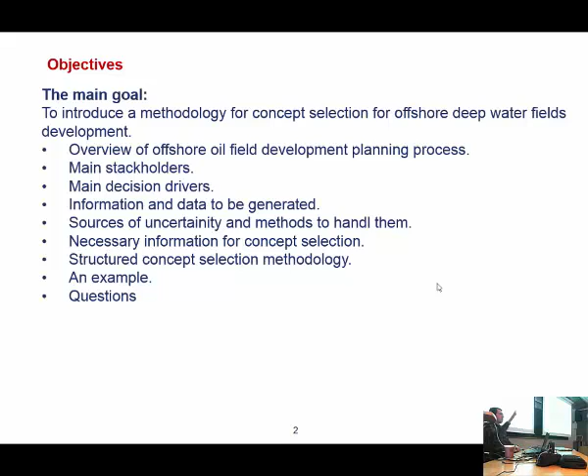But whenever you have a question, just raise your hand and stop me - I can answer your question during the presentation.

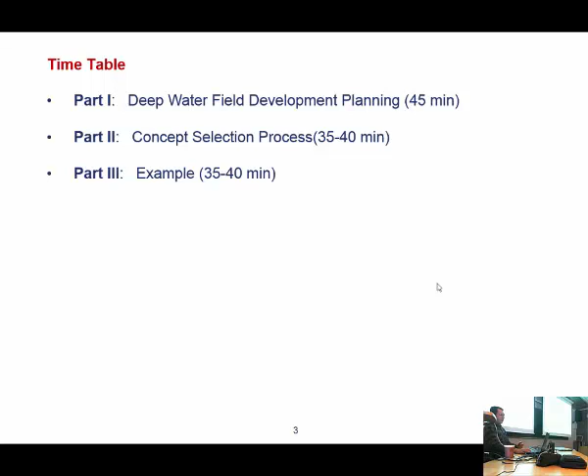Based on the initial schedule of the class, I have divided this presentation into three different parts. First part is deep water field development planning, which I think most of you are quite familiar with - it's mainly about subsurface. Second part is the concept selection process, and the third part is an example.

But let me explain why I selected this topic, or why I, as a naval architect, became interested in it. First of all, this topic was one of my personal concerns, both during my education at university and during my career in industry. Also, this topic was not touched upon properly during my education, at least at the Department of Offshore Engineering, and I haven't seen any courses at any university yet on this topic.

This is also one of the main challenges for all offshore oil operators. It's a very interesting topic because it's interdisciplinary, and when you study this topic you will become familiar with other disciplines in your business.

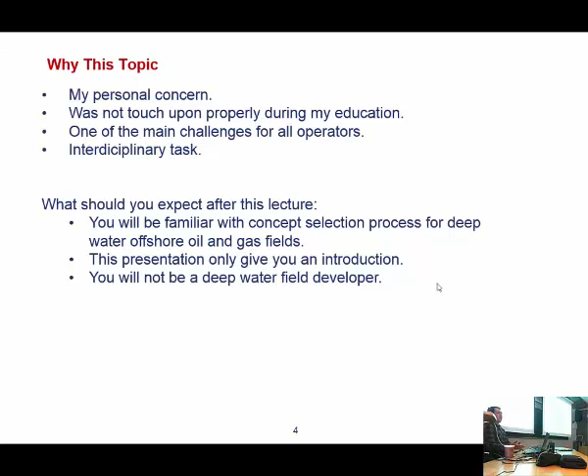So what should you expect from this lecture? Definitely you will become familiar with the concept selection process for deep water offshore oil and gas fields - this presentation is only an introduction to this topic. So you should not expect to be a field development planner after this lecture; you will definitely need much more information and much more experience.

Classification of offshore oil and gas fields. To reduce the effort to select proper technology and strategy and cost estimation method suitable for your offshore oil and gas field, it is better first to categorize offshore oil and gas fields based on major properties.

In general, we can classify offshore oil and gas fields based on these main characteristics: water depth, environmental condition, and reservoir size. For example, based on water depth, with the main function of operation, not drilling, because then the classification would be different. For operation, we can classify offshore oil and gas fields into shallow water, intermediate water, deep water, and ultra deep water for this range of water depth. But these are not fixed definitions.

This is just a rough estimation because the industry is improving. Up to now, the technology which has been used for shallow water, which is the jacket, has been used to a maximum water depth of 420 meters, which is the Bullwinkle jacket in the Gulf of Mexico, I think. And this is proven technology for this water depth.

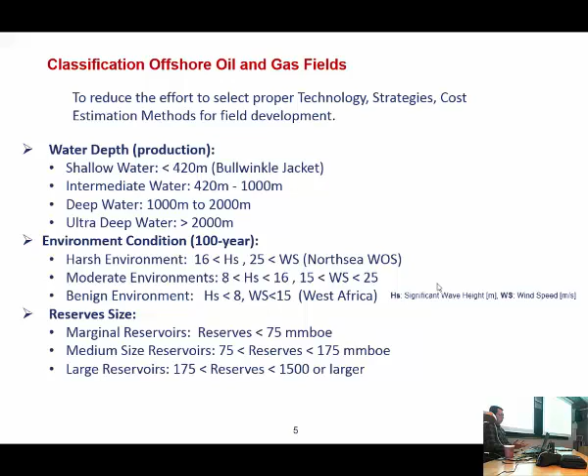Or based on reservoir size, we can define them as marginal reservoirs, medium-sized reservoirs, large reservoirs, or sometimes I've seen ultra-large reservoirs as well, which is based on the reserves in the reservoir.

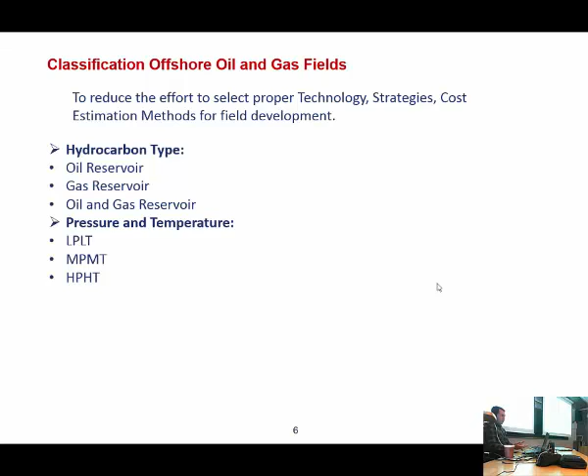We can also divide offshore oil and gas fields based on hydrocarbon type. It can be an oil reservoir, gas reservoir, or oil and gas reservoir. It can also be categorized based on pressure and temperature: low pressure, low temperature; medium pressure, medium temperature; and high pressure, high temperature.

But you may have this big question in your mind: why should we go to deep water when we have a significant amount of onshore and even shallow water offshore oil and gas resources? The answer can be explained by this graph here. This is the global energy demand based on historical records for the last 45 years and forecasted for the next 15 years. As you can see, global energy demand is still increasing, and oil and gas still make a major contribution to that.

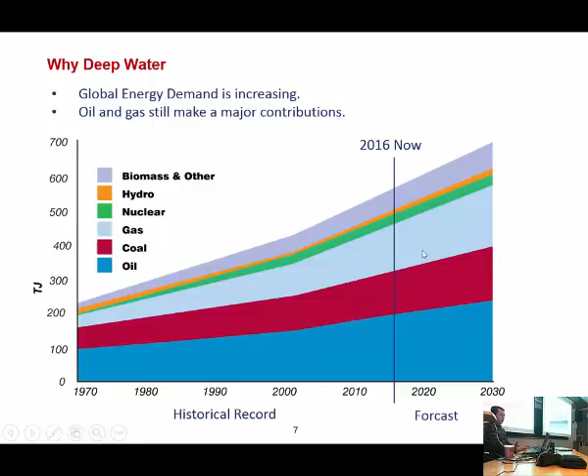On the other hand, if you look at the historical offshore, shallow water offshore, onshore and deep water offshore production during the last 50 years, shown here, the bottom part shows onshore oil production, light blue shows shallow water oil production, and the black shows deep water offshore oil production. By looking at this graph, you can figure out that onshore oil production passed its peak in 1979 and is declining in different parts of the world at an average rate of 4 to 8% per year.

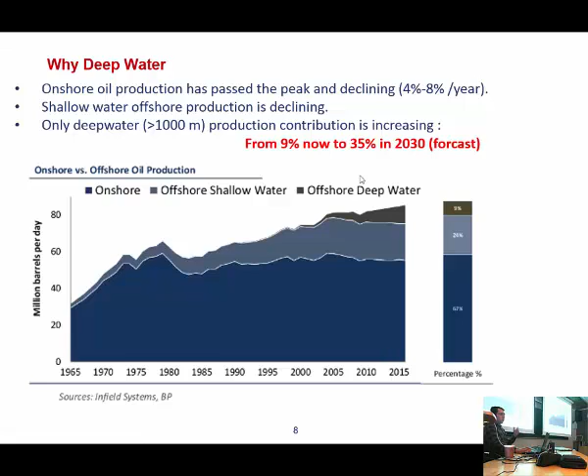Also, shallow water offshore production is almost unchanged, or even some records show it is also declining. What remains is only deep water offshore, which has a 9% contribution to total oil production, and this production has to increase to 35% to cover global energy demand by 2030. So what remains is only deepwater offshore oil and gas resources.

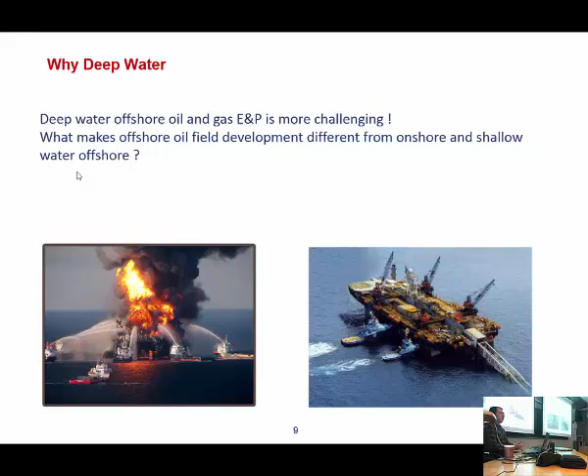But operation and planning for deepwater offshore is quite different from shallow water and onshore oil and gas production. As you can see here, deepwater offshore oil and gas exploration and production is more challenging. But what makes it more challenging compared to onshore and shallow water offshore?

Fortunately, the technology for deepwater exploration and production up to 3,000 meters has been developed and approved. That means now humans are producing oil and gas at water depths of 3,000 meters.

But what still makes this business different from onshore and shallow water offshore is, first of all, you need higher capital cost, drilling cost, and exploration cost. There is high uncertainty in most commercial parameters like well performance, recovery, and oil prices, and there is substantial risk for operation in this area.

As you can see here, a small failure in the system can lead to such big consequences, and you may lose all of your property there. Because you are working in a remote area, maybe 200 miles from onshore, you are working in a harsh environment like west of Shetland or northwest of Australia, and most of the time you are working with high pressure, high temperature reservoirs.

How is well performance related to the depth of the sea? Because as far as I know, in deep water measurement is more difficult than shallow water, and when you have a less accurate measurement, this will directly affect your prediction.

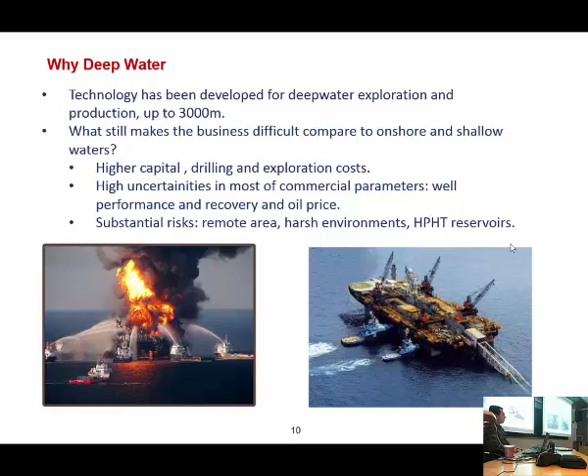Go ahead. Thank you very much. So now we'll make some fundamental questions to be considered during this presentation, and we are actually going to answer these questions.

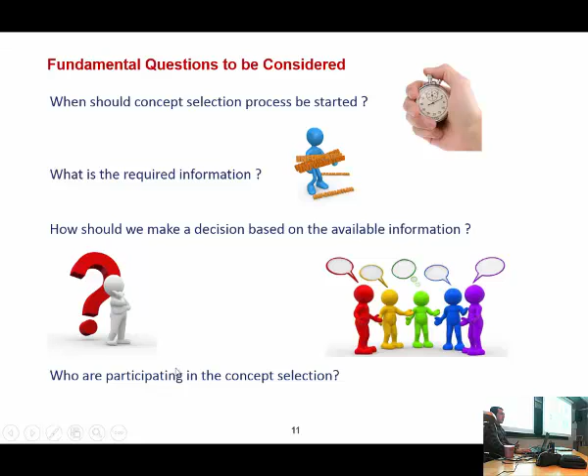First, when should the concept selection process be started during field development planning? What is the required information to be used for concept selection? How should we make decisions based on the available information? And finally, who are participating in the concept selection process?

To better understand the position of concept selection during field development planning, you should note that concept selection is a subset of a multidisciplinary process called field development planning. As you probably know, a typical offshore oil and gas life cycle can be divided into 8 subsequent phases.

It starts with acquiring the lease, which the government usually organizes based on the size and location of the block through a bidding process. Different operators, maybe alone or grouped together, will attend this bidding process, and one or a group of them will win the exploration license, and then exploration, the second phase, will start.

The operator, with geological study, exploration methods and exploration technology, will specify the first location for wildcat drilling. The main objective is to find the reservoir.

After you find the reservoir, you start the third phase, appraisal, which doesn't actually start exactly after exploration, because some activities run parallel with exploration activities. The main objective is to specify or improve your information about the dimension of the field, field life, field characteristics, production rate, and reserves.

After you have enough information, you can go to the concept selection phase, where you specify different concepts, and then do technical feasibility and economical viability studies, calculate the revenue and required investment. There is one important point to notice here: when you are doing concept selection, there is still high uncertainty in the reservoir characteristics.

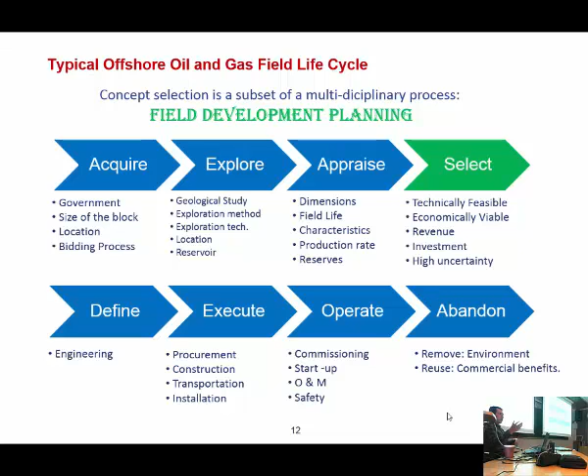After field life finishes or production rate drops below economic margin, we go to the last phase, which is abandonment. You may need to remove the infrastructure completely to avoid damage to the environment, or you should plan to reuse it to make some commercial gain. For example, you can use the available structure for neighboring fields which have been discovered later.

But why did field development planning become so important in the offshore oil industry, especially in deepwater offshore oil? To answer this, we can look at the historical development in the offshore oil industry, which was mainly initiated from the Gulf of Mexico. The first floating production unit in the Gulf of Mexico was used in 1986, Green Canyon 29, which was a semi-submersible. After that, during just 13 years, 12 floating production units were sanctioned, which were SPAR type, semi-submersible, and TLP type, by major oil operators, big operators.

But after that, in just 2 years, a boom in using floating production units happened. 14 floating production units were used in the Gulf of Mexico in just 2 years, consisting of 11 dry trees and 3 wet trees. This time, independent oil companies, smaller oil companies, came into the game. So you can imagine how big the competition was between them.

During 2000 to 2005, even with low oil price, 13 floating production units were sanctioned in the Gulf of Mexico, 10 dry tree and 3 wet tree. But what was the reason for this acceleration? The reason was, one, high oil price for oil and gas for some period, which shows that there is potential for production from deep water.

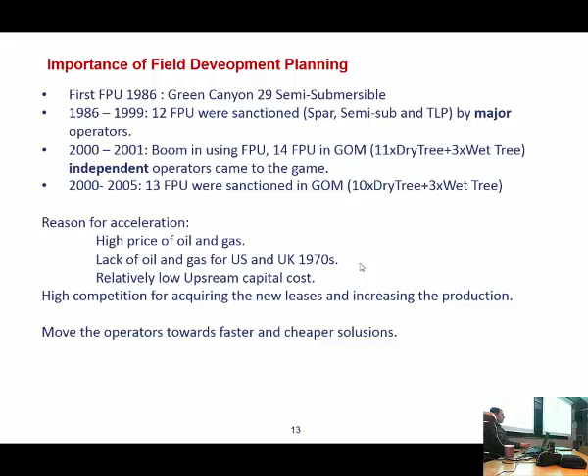What is this dry tree and wet tree? This is a type of Christmas tree, which I will explain later. Depending on the position, if you have a Christmas tree on the seabed, we call it wet tree, and if it is on the platform, we call it dry tree. I will explain this later.

This had very bad consequences for our industry, which were discovered a few years later. An assessment of existing projects in 2005 by major oil operators showed that a significant percentage of deepwater offshore oil and gas reserves were underperforming both technically and commercially due to poorly executed field development planning. That was not mainly due to weakness in execution or technology; it was because they had selected the wrong concept. For example, after a few years of operation, they realized they needed 4 more risers on their platform, but they hadn't considered enough space there.

This fact has been explained with this beautiful graph here. This graph shows that in the first 4.5 phases of an offshore oil and gas field, you can have major influence on the value of your project if you have poor definition, meaning if you don't spend enough time and money. In the execution phase, if you have good or poor execution, there will not be so big a difference. But if you spend enough time and money and make good definition and good planning, then during execution phase, even with poor execution, you still get much more value compared to the first case.

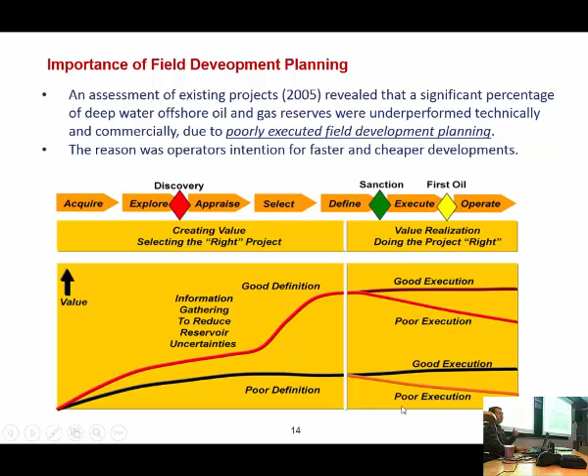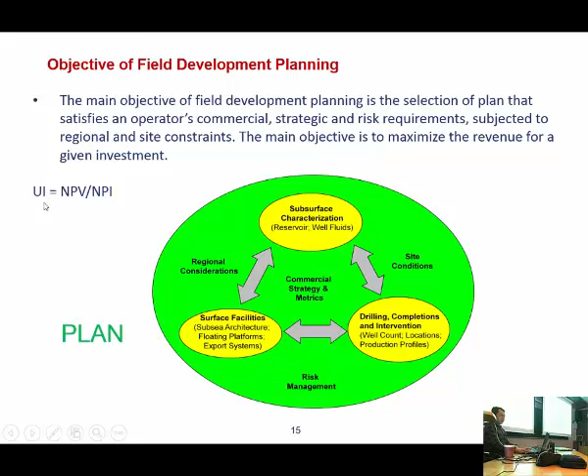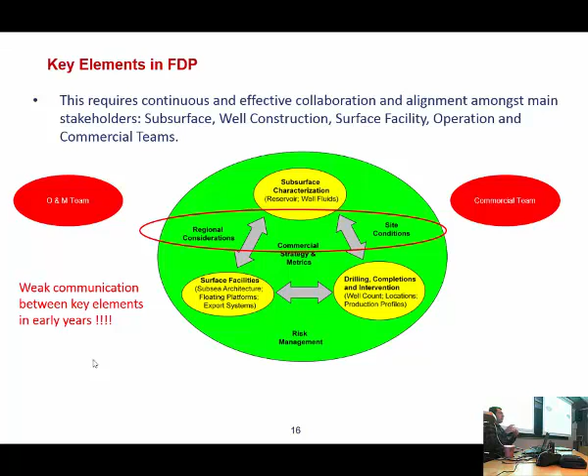In order to have a successful field development plan, you need continuous and effective collaboration and alignment among main stakeholders: subsurface team, drilling and completion team, surface facility team, commercial team, and operation and maintenance team. Weak communication between these key elements in the early years of the offshore oil and gas industry was the main reason for underperformance. All of these teams were working independently without considering the effect of their results on the subsequent discipline.

This flowchart shows a methodology for concept selection. In the first step, the subsurface team makes an initial reservoir model based on seismic data, well logs, well tests and other measurements. After that, the subsurface team together with the drilling and completion team makes different depletion scenarios for the reservoir, including different well counts, different top hole locations, and resulted production profiles. Their main objective is optimizing the drilling program, meaning greatest recovery with fewest wells.

But why is number of wells so important for deep water? Because drilling and completion may be around 25% or even up to 50% of the total budget required for field development, while this can be much less onshore or in shallow water offshore.

In the next step, the surface facility team will identify different basic building blocks based on this depletion scenario, considering site conditions, existing infrastructure, and market strategy, and they will generate multiple development scenarios for this field, which is called the concept screening phase.

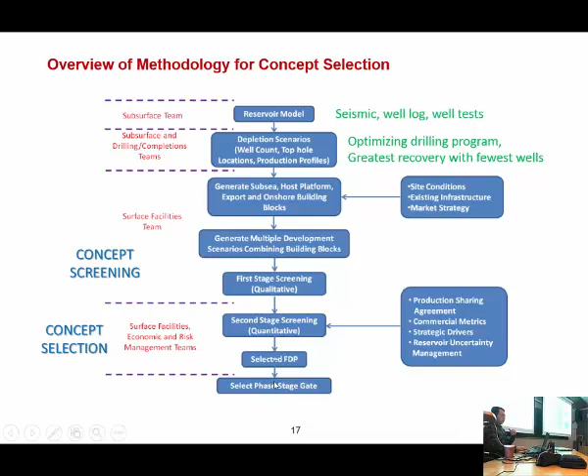In the next step, called concept selection, the subsurface and facility teams together with economic and risk management teams will consider different production sharing agreements, commercial metrics, strategic drivers, and reservoir uncertainty management methods. They make a quantitative, more accurate comparison between the remaining concepts until they finalize one concept, which will be sent to the selection phase. So this is the whole story of concept selection and screening in one slide.

What are the main input parameters and their effect on field development and concept selection? In general, we can divide the parameters into 6 different groups: reservoir geometry and geology, which has the greatest effect because they directly determine recovery factor and flow rates; well count, location and construction; secondary recovery methods; fluid properties, which can directly affect subsea and topside design, operation and maintenance requirements; and drilling and completion, which can directly determine well management requirements and well intervention frequency during production.

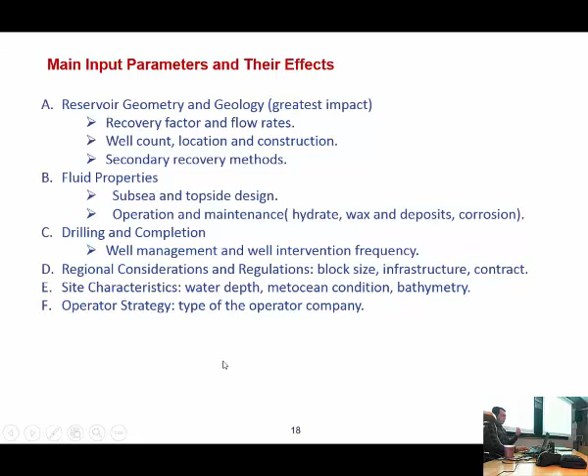After that, regional and site constraints and regulations, site characteristics, and operator strategy, which we will explain in more detail in following slides. This slide shows the relative importance of parameters in reservoir geology and geometry.

Usually field development planners keep this as a main guideline in their mind, and they know that permeability is very important, for example, for secondary recovery. So this is one of the quantities that should be characterized as accurately as possible, and almost there is no limit on that. You should try to improve your understanding of the permeability as much as possible.

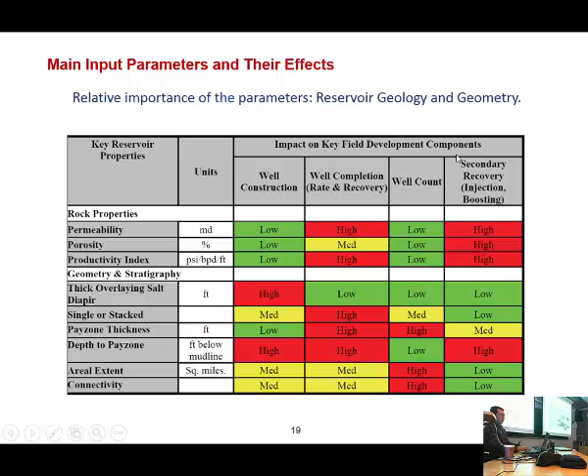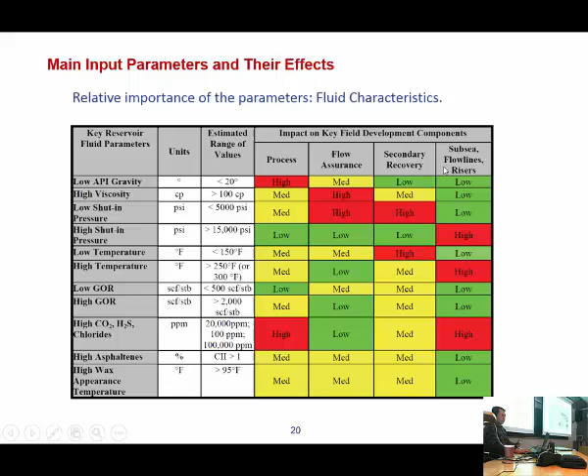This is the effect of other parameters on key field development components. For example, this slide shows the relative importance of fluid characteristics, or their effects on field development components. This is just to show how important different parameters are for field development planning.

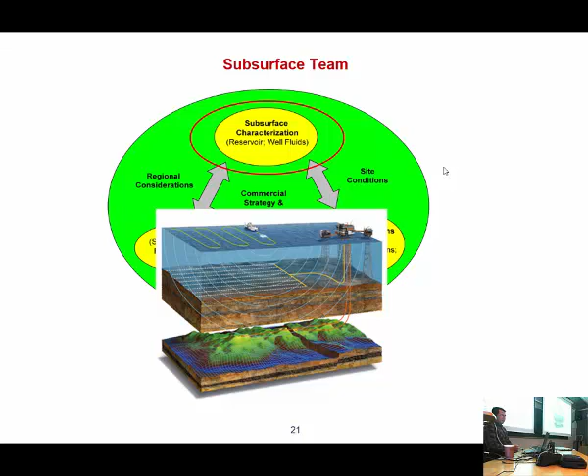Now we will take a look at the responsibility of different teams during field development planning, mainly concept selection. The first team is the subsurface characterization team. Their main objective is to characterize the reservoir, but how is a reservoir defined?

You need to determine hydrocarbon type and saturations, oil-water and oil-gas contact lines, fluid physical properties, fluid systems and chemical compositions, driving mechanisms of the reservoir, and flow rate and pressure variation over time. When you specify these parameters, then you can have a reservoir ready for concept selection.

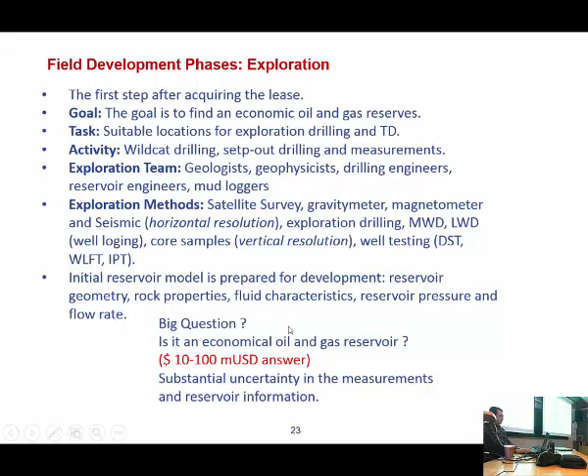At the end of the exploration step, your boss may ask you a big question: is it an economic oil and gas reservoir? And you can tell him you should spend $10 to $100 million more to answer this question, because there is still substantial uncertainty in the measurements and reservoir information, even after you find the reservoir.

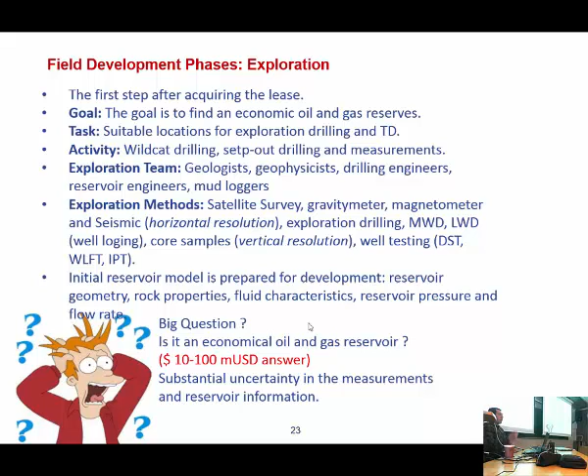Because of that, to improve our information, we start another phase called the appraisal phase. The main goal in this phase is improving the quality of the data and reducing uncertainty.

The outcome of this phase will be fluid characteristics, original oil in place, recoverable oil, and production profile - but still with sufficient uncertainty. Uncertainty actually is your best friend during field development. You cannot completely remove it.

In this phase, the methods you use are quite similar to those used during exploration. For example, you make more appraisal wells at different locations, but with more measurement, or better to say, much more accurate measurements.

In this step, the subsurface team finally provides a robust reservoir model from seismic data, appraisal wells, well logging, and well tests.

One of the main tools in this step is reservoir simulation, where you do multiple simulations with varying well types. Using measurements from the appraisal phase, you start making new wells with your reservoir simulation software and try to fit your data to the measurements. Using that, you can characterize uncertainty in your parameters.

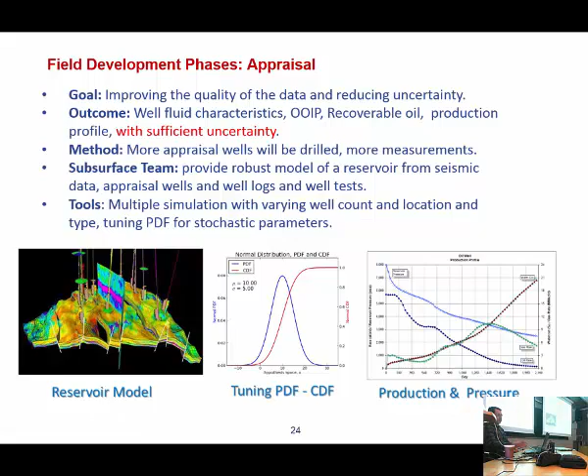For the field appraisal phase, there are several different methods and strategies to reduce uncertainty, as shown here. There is always a trade-off between cost and risk reduction. If you need a more accurate method, you should spend more time and more money.

Different methods available now are drill stem test, more appraisal wells, extended well test method, early production, and stage development and phase development strategy. It's not actually only a method, it's a strategy. For example, instead of developing the field completely, you divide the field into several phases.

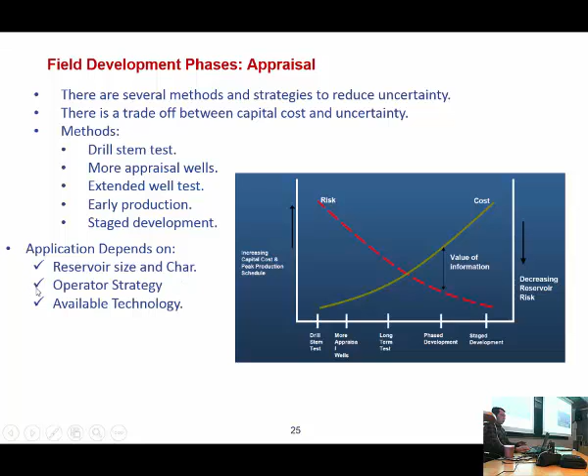Like Johan Sverdrup, you start production in one phase. After you collect more information and improve your understanding about the field characteristics, after 5 years of production you make a new plan for the rest of the field. So application of this method depends on reservoir size and characteristics, operator strategy, and available technology.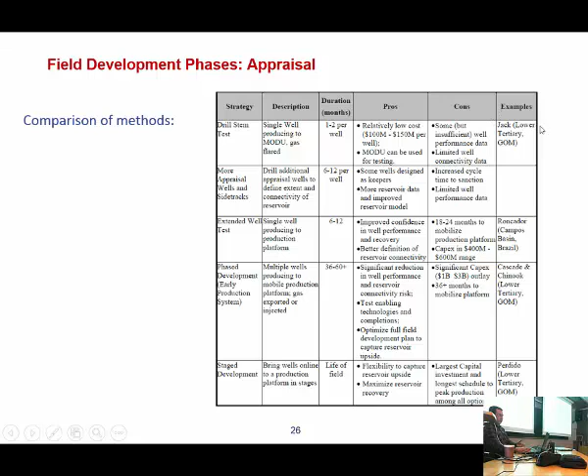Here, just for example, we have a table which shows these different strategies and methods, their general descriptions, typical durations of the test or method, advantages and disadvantages, and some examples that you can take a look at later. It's quite self-explained.

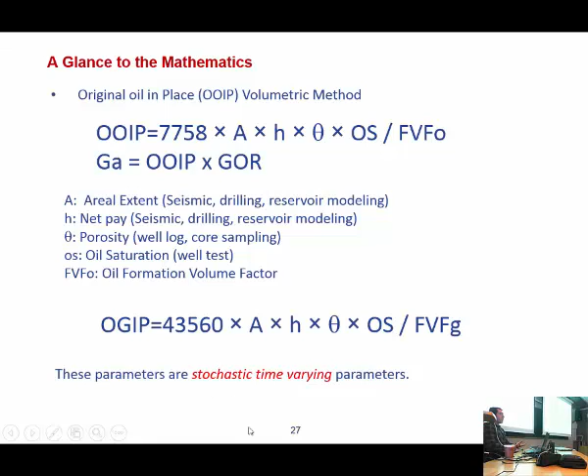So here, just to show the complexity of the problem, we take a glance at the basic mathematics of field development. For example, original oil in place is a function of several different parameters, as you can see here. All of these parameters are in some way stochastic, time-varying parameters. They are stochastic and some of them are also varying over time.

Or here, for example, is oil production rate. Again, it's a function of several different parameters like downhole pressure, reservoir pressure, permeability, some of which are also a stochastic problem. You can, for example, specify production rate by curve fitting to the well test data, fitting your measurements to exponential, harmonic, and hyperbolic curves.

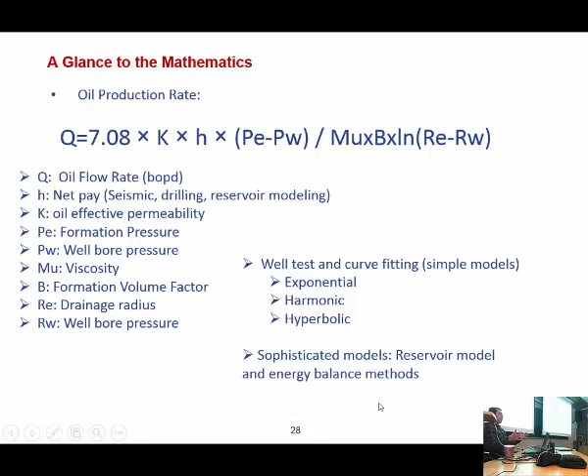Or after some years of operation, when you have enough information available, you can make sophisticated reservoir simulations, and by the energy balance method, you can improve your reservoir estimation and production rate. But as you can see, it is very difficult to make a decision based on a multivariable stochastic problem. We should find some way to integrate all of this uncertainty together into a single problem and then make a decision on that.

As suggested by the Society of Petroleum Engineers, for financial evaluation, uncertainty in all the parameters should be integrated into a single parameter, which is the production profile. Then at the end, you can have 3 different confidence levels for your reserve estimation, or better to say for your production profile.

These are known as proven, probable, and possible. To understand those, it's better to say: if you make a calculation based on information which you are 90% sure about the correctness of the data, you will get proven — you get one profile. If you use data which you are only 50% sure about, it will be probable. And if you make an estimation based on data which you believe is only 10% correct, you will get possible.

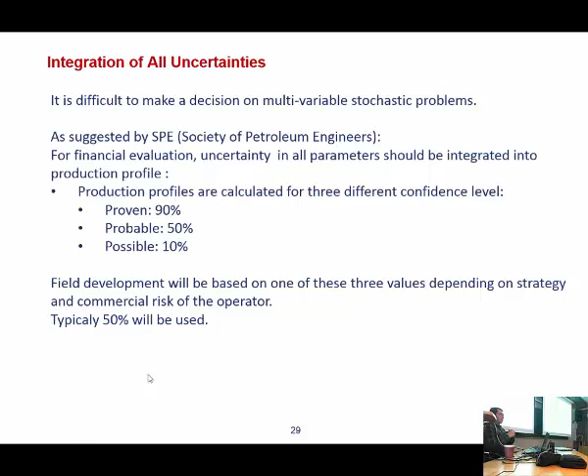So the next team is the drilling, completion, and well intervention team. Well construction and intervention is the main objective of this team. But what does well construction mean? Well construction actually means determining the construction of the well in the first place, which includes specifying the location of the wells.

Wells can be either production wells, water injection wells, or gas injection wells, with required depth of the well, direction of the well, and well casing design. Also determining well type — production, water injection, or gas injection — and the type of completion, including the perforation zone, meaning which part of the well you have to perforate to start production from that part.

And with which sequence, because the level of oil and gas is changing during the field life, to have optimum production you should find the best location of the perforation zone and how to change it during the production life.

Perforation method can also directly affect well performance, for example, sand production. Also one of the main decisions which affects concept selection is type of access to the well—whether you need direct vertical access to the well from your floating production platform, or non-direct vertical access. You can have your floating production platform here, and access like this.

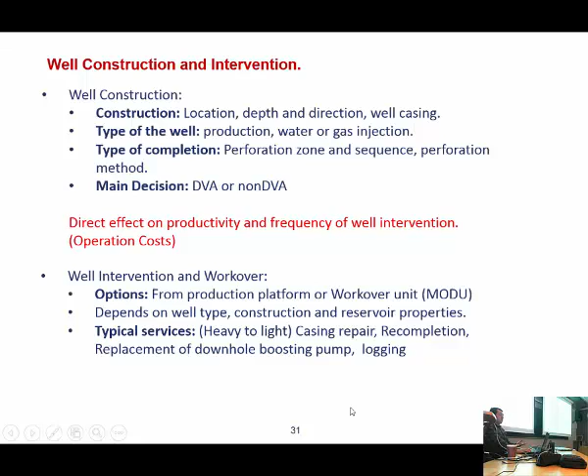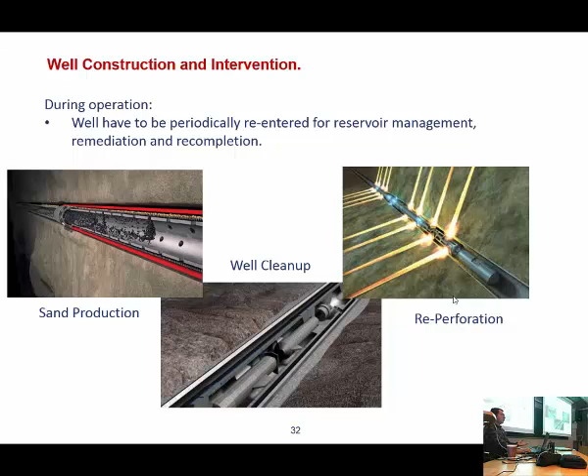For example, when you start production from your well, you may get some sand production, which depends both on reservoir rock properties and also on type of completion. This sand production may reduce your production, and then you have to stop production, send some equipment inside the well, clean up, and start production again. Or you need to reperforate some new zones because the oil level has changed. Or even your estimation was wrong, and after some production, by reservoir simulation you understand this was not the optimum zone for production—you have to move it to new places.

As we mentioned, one of the main decisions during well construction and well intervention is type of completion, or better to say, type of well and well access, which depends on the location of the Christmas tree. You have in general two options: you may have a subsea well, also known as wet tree, with direct vertical access or non-direct vertical access—both are possible—or a surface well, or dry tree, where only direct vertical access is possible.

This is an example of a dry tree system, which is exactly the same technology we use onshore. And this is a wet tree system, which is the Christmas tree with some additional equipment for automation and also for safety, as you can see here, which is located on the seabed.

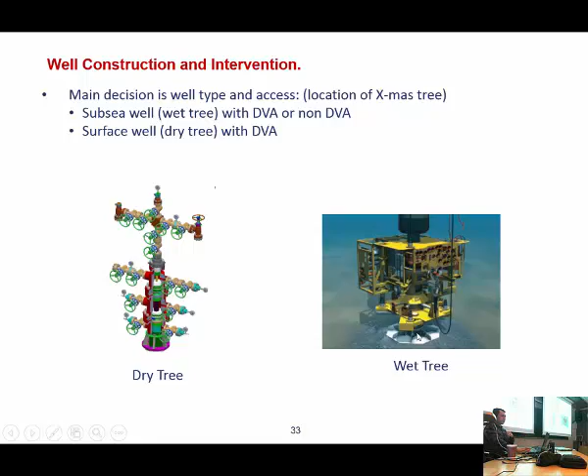But why should we use wet tree for some reservoirs and dry tree for others? Because of the advantages and disadvantages of both. Wet tree or subsea well, as you can see in these two pictures, has in general lower capital cost but higher operation cost. This depends on the number of wells and also the operator's strategy, which puts more emphasis on capex or opex. Also, in general, subsea well gives you lower recovery compared to dry tree.

This is not absolute recovery—this is just 5 to 10% less than a similar dry tree system. It's also usually suitable for low pressure reservoirs, but it gives you greater flexibility for well placement. As you can see here, you can just put your wellhead wherever you like, and then have direct drilling without needing directional drilling, which can increase the cost of drilling significantly. It's also suitable for high uncertainty reservoirs and multiple sub-economic reservoir development.

Also, all host units support wet tree, so you don't have any limitations for the top of the floating production unit, and both direct vertical access and non-direct vertical access are possible. So why is the recovery less in this case? One factor, at least that I know, is because of the technology you are using on the subsea system, which needs more safety there.

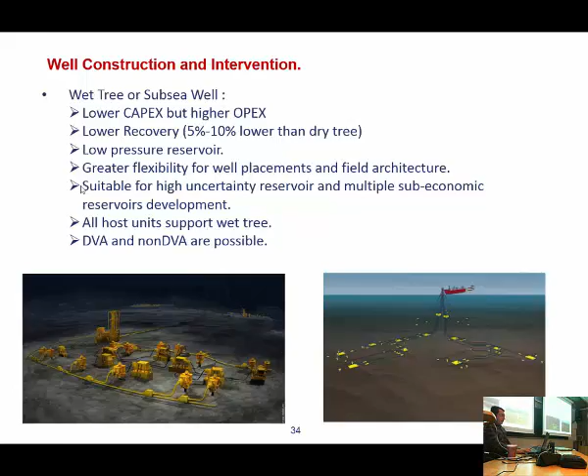But on the other hand, dry tree or surface well systems need higher capital cost but lower operation cost. So if you have a reservoir with like 25 years lifetime, a dry tree system can be better because it has lower operation cost, and the accumulated cost in the long term will be much less than a wet tree system. It also has relatively higher recovery and is suitable for high pressure reservoirs, which is also very important.

But you can only use it on a fixed platform or floating production platform with very limited horizontal motion, like a TLP you can see here. Only direct vertical access is possible. As you can see, the dry tree system requires direct access to the well and top tension riser, and also you have a limitation on the type of risers, which are the flow lines from seabed to the platform.

But one of the advantages is that you can put a full drilling package on the floating production unit, which for big fields or large reservoirs can significantly reduce the total cost of the project.

The requirement for a complete drilling package in the Gulf of Mexico depends on the size of the reservoir and number of wells. For very large reservoirs, for example those with reserves more than 170 million barrels of oil equivalent and more than 12 wells, they have a full drilling package on the floating production unit. The reason is you can leave some wells to be drilled and completed after operations start, and also do all the workover and well intervention services from your floating production unit.

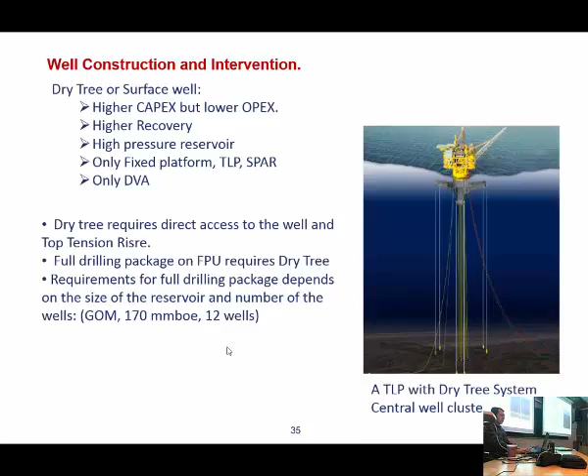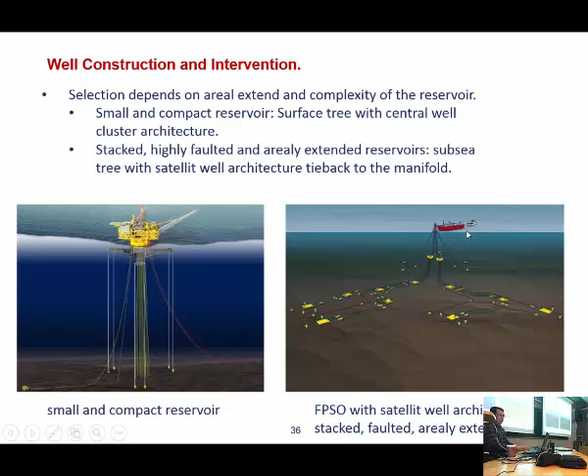But selection of wet tree or dry tree depends mainly on the areal extent and complexity of the reservoir. If you have a small and compact reservoir, then a surface tree with a central well cluster, drilling all the wells from one point with directional drilling technology, can be a good option or first priority. But if you have a stacked, highly faulted and areally extended reservoir, like the figure on the right side, then a wet tree system with a satellite well system tied back to the floating production unit can be a better solution.

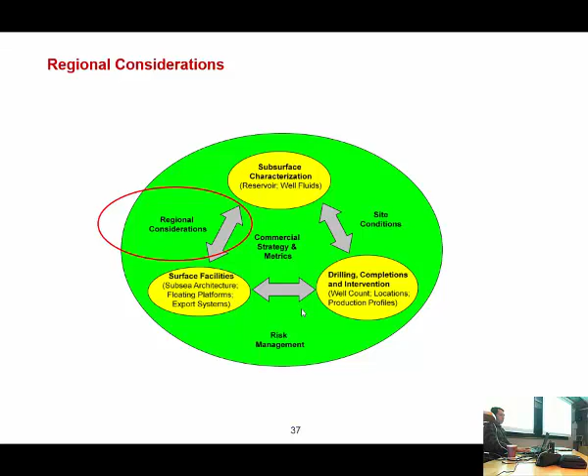Beside these three themes, there are also some main decision drivers for field development planning. One is regional considerations or regional parameters, which have a significant effect on net present value and net present investment, and also the field development process, such as block size, infrastructure, market influence, local content, regulations, contract terms and conditions with the host country, and sustainable development.

For example, in the Gulf of Mexico, most blocks are 10 to 15 square miles, which gives potential for independent oil operator companies like Maersk Oil, VNG Norge, or Lundin to enter the bidding process. But in West Africa, the average block size is around 200 to 230 square miles, making it difficult for independent operators, so usually major or small oil operators have to group together and share risk to attend the bidding process, which can affect strategy since operator strategy highly depends on company size.

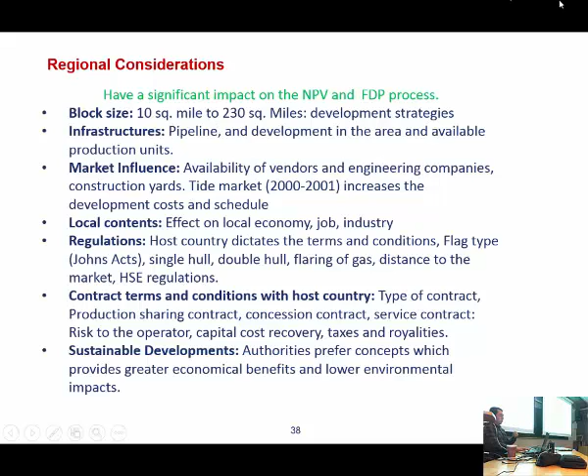When developing a new field, you should also look at the available pipeline, because, for example, in the North Sea you are not allowed to flare gas and must export it. If you are far from the available gas network, that can become one of the major costs in your project. There are some other parameters you can look at later.

Another decision driver is site conditions, which directly affect field architecture and the floating platform, such as water depth. There is a one-to-one relation between water depth and drilling cost.

This can directly affect design and installation of the risers, mooring system and pipeline. Also, when you increase water depth, the temperature of the seabed water is reducing, which can make some flow assurance issues for pipeline and flow line design. Also, bathymetry and geology can directly affect subsea flow line installation cost and anchor design.

Metocean conditions can affect the installation window, which is a very important parameter for concept selection. For example, when you go to the North Sea during winter time, you have a very limited suitable weather window for installation and repair. So in the concept selection phase, this can be one of the decision parameters, because you will not go towards concepts which need long offshore installation, like a spar. This might also be one of the reasons you don't see so much spar and TLP in the North Sea.

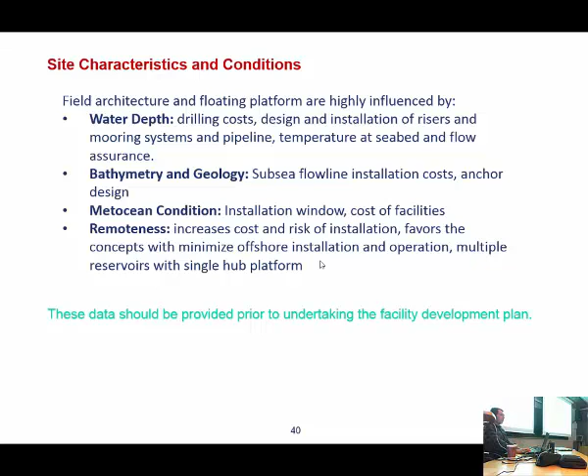But also, as we mentioned, operator strategy is a very important decision parameter, which can be related mainly to the size of oil operator companies. Oil operator companies in general can be divided into three main groups: independent oil companies, international oil companies, and national oil companies.

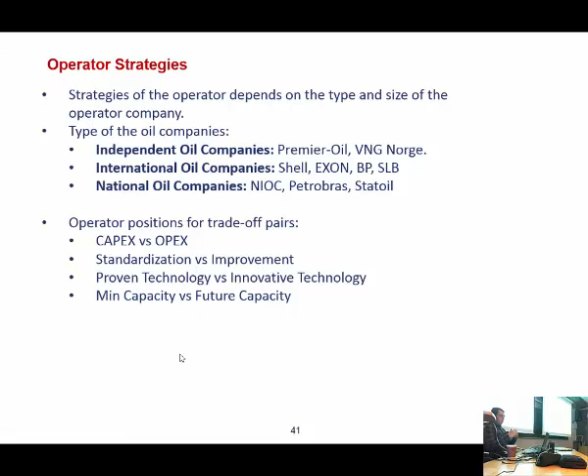The strategy of the operator is directly related to the position of the operator towards these trade-off pairs: CapEx or OpEx, meaning whether the operator gives more weight to capital cost or operation cost. Standardization versus improvement, because usually major oil operators have some standardization strategy in their development, which limits their flexibility. Then when they go to concept selection, that limits them for innovative solutions. Proven technology versus innovative technology, and min capacity versus future capacity.

Independent oil companies operate almost 15% of deepwater offshore oil production. Their focus is mainly on small to medium-sized fields because of their capital cost and the amount of risk they can take. They usually join with other operators to share their risk, and they prefer a leasing strategy when going into production.

For example, VNG Norge is now developing a field, Pil and Bue, and they are in the concept selection phase. The final solution they have decided on is FPSO. They had two options, a new build FPSO or a leasing FPSO, but finally they decided to go with a lease FPSO because, especially in this market, it needs less capital cost and is less risky for them.

They also usually have a short development cycle time, and a small engineering team with fast tracks. They are also first users of new technologies, because one of the benefits of new technology is reducing the schedule to first oil, and this makes them more flexible towards vendors. Subsurface is usually the largest team in their company.

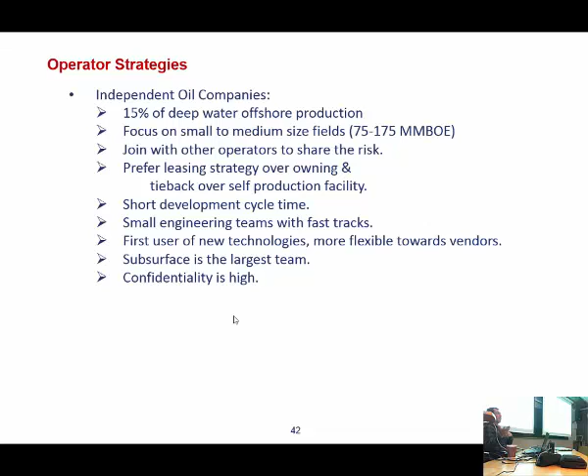Confidentiality is also quite high. For example, my friends who work at VNG Norge, when they get close to the reservoir during drilling, are completely isolated from others. Because if you know you're getting close to the reservoir, you could call a friend and tell them to buy 5,000 shares of your company, and after they find the reservoir, the share price could rise by 5-6%, letting you make a lot of money. This is why they usually have very tight security for the exploration team.

International or integrated oil companies like BP, Shell, and ExxonMobil are operating 50% of deepwater oil production at the moment. Their focus is on medium-sized to large-sized fields.

They're usually using their own technology as long as possible. For example, now my company is designing an FPSO for Shell. Up to now, when we design an FPSO, we also take responsibility for the topside. But now Shell told us they have their own team to design topside. So for this project, we only designed the floating production unit, the hull, riser, and mooring system.

And they have more process-driven stage gates, which increases development cycle time to first oil. For example, when we send one document to Shell for approval, it takes 2 weeks. But when we send the same document to Premier Oil, it just takes maybe 1 day or even less, because they have less stage gate approval system.

And they prefer to use proven technology. When we work with Shell, they are very concerned about proven technology. Even polyester rope, used for mooring lines, which has been used for more than 10 years now, from Shell's point of view is not proven technology, because proven technology means something used for more than 15 years. But a small oil operator doesn't care about that. They just use something that can get them to first oil as soon as possible.

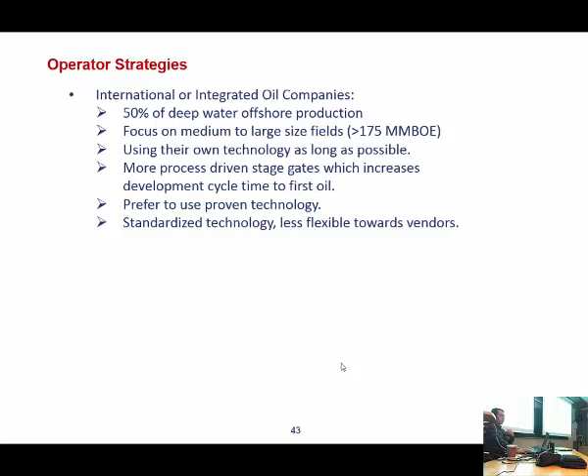Standardization technology is one of the major strategies of international oil operators, which makes them less flexible towards vendors. Finally, national oil companies, which operate 35% of deepwater oil and gas reservoirs, mainly Petrobras and Statoil, focus mainly on global development plans and basin development rather than just block development. They use phased development strategy and early production to reduce uncertainty, and they can take more risk because they have higher risk margins, and exploration results can even be made publicly available.

For example, after some years—5 or 6 years—Statoil gives free access to exploration results, because then it becomes cheaper for other oil operator companies to come and do exploration there. Or even, I heard that Norway provides some exploration fund to exploration oil companies. After they reach the reservoir, they can pay it back.

New companies that come to Norway get 85% of the cost of exploration funded first. But they don't have much time—they have to work quickly. The whole exploration period is about 5 years.

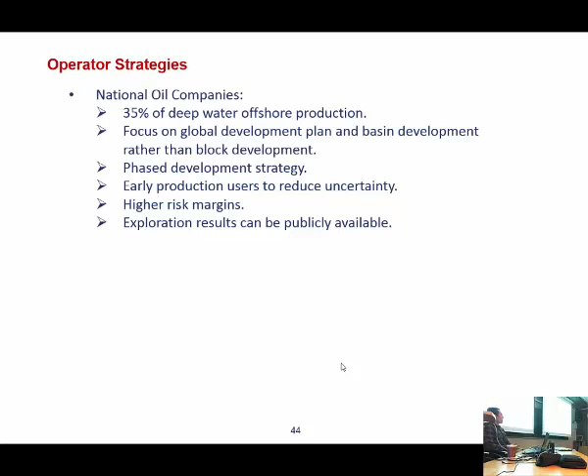In some places they allow you 5 years to explore and come up with a concept to start developing, and then you have another 25 years to produce. But in other places, you have 2 years, and after 2 years you have to give half of the block back to the government. So within the first 2 years, you have to do all the seismic work and everything possible to decide which half you want to keep. Then after another year, they say give back half of the half. They want to force you not to just sit and wait to see what others are doing, hoping some neighbors make discoveries before you decide what to do.

So you see, this takes 6 months, that takes more months—you have no time, you have to work very quickly. If you don't, they take the field back from you, or you make a bad decision. You declare commerciality, commit to a development, and then get stuck because the banks don't want to give you money—they think it's not a good enough prospect.

But in Norway, it's a strange situation because all the small companies are running here. They do exploration but don't know how to do development, and don't have money to do development. But for exploration, it's only 15% of the cost—the rest is paid by the government. That's the strategy here, and it works.

Now it's different in mature areas. For example, there are certain areas in Norway considered new areas, and they say you have to be crazy or very rich to go explore there—so we'll help you, we'll subsidize it. But in very mature areas, the government very rarely gives you such incentives. Norway is a bit special, but each country has a different strategy for how they sponsor or subsidize exploration for newcomers.